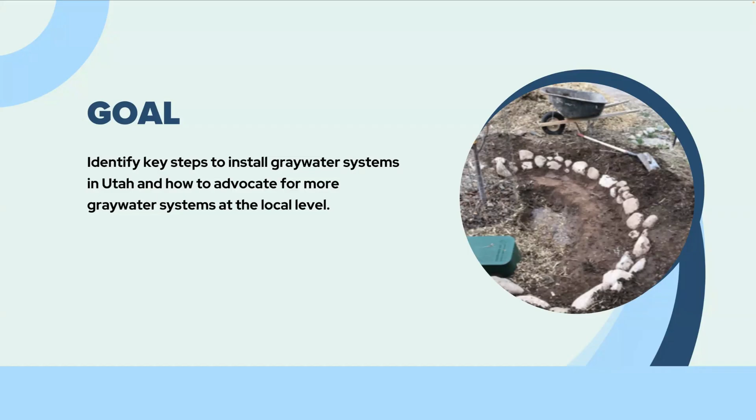Okay, so when you walk away from this talk, we're hoping that you'll be able to articulate what graywater is, and list major aspects of Utah's code. Of course, you won't memorize the code, but maybe some major parts that are important to know about our code in Utah, which was revised in 2020 and simplified, made much more accessible for people right in the peak of the pandemic. And for you to be able to describe benefits and drawbacks of graywater systems based on our experience, visualize a branch drain system, which is what my system is in my household, recall major best management practices, and be a local graywater leader. So with that, I'll pass it over to Orion here to talk some about the graywater code.

All right. So within the health department, we are charged with regulating on-site wastewater systems, and graywater systems fall into that regulation. So there's an R317-4, which is on-site wastewater systems. Most of you are going to know of them as being called septic systems, but graywater systems are quite a bit different from that. With the graywater system, and we'll talk about it more, what fixtures can go out there and whatnot, but graywater is a way to divert some of the water that would normally be going into the municipal sewer system. We can talk about septic systems later if we want to, but so that regulation falls into place.

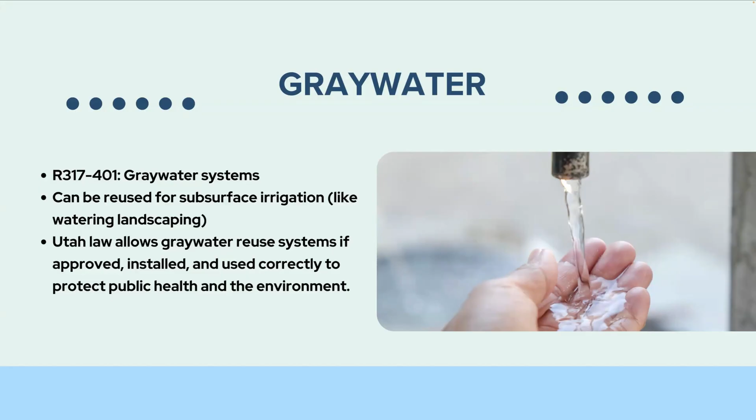And so after having chats with Roz and Jeff Adams, one of our other colleagues that we've worked on this with, I took it to the state to propose the idea of changing that rule, and then all of the other health departments, as well as mine, as well as the state DEQ, Division of Water Quality specifically, got together and rewrote the Graywater rule to make it more accessible and feasible for people to actually be able to do it. And so I think that's probably enough background on that for this slide. We'll go into more of it, I guess.

So Graywater specifically in Utah and many other places is just defined as water coming from the bathroom faucet, laundry facilities, showers, and bathtubs. And there's more slides that kind of talk about this, but you'll notice that the kitchen faucet is missing, and that's because of the higher expected bacterial loads that would be going through that from food wastes and other such things.

Go ahead, Roz. Oh yeah, sure. So I'll just, before I move into some term definitions, say that Orion did lead the charge, which was incredible, in helping to revise that state code. It was a many-year process. It was approved in 2020, I believe. And that allows for these gravity-fed systems as opposed to the more complicated systems in the previous code requiring tanks and pumps and engineered plans and other things. So we'll go more into that as we dive deeper into what these systems look like and how they work.

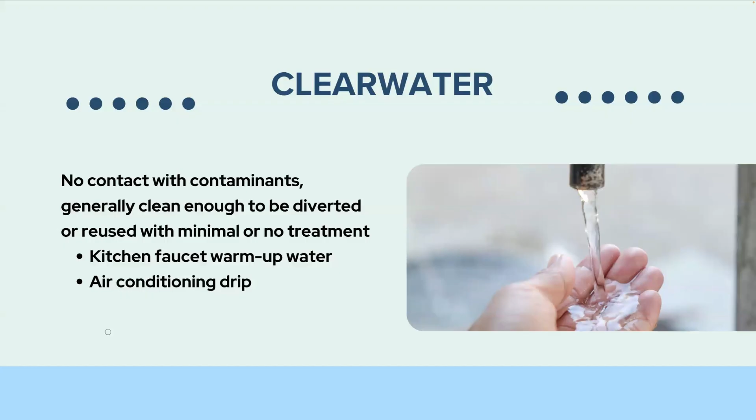So just to get our terms straight, let's differentiate Graywater from clear water. So clear water includes water sources like filling up or heating up your water to wash dishes in the kitchen sink. While you're waiting for that water to heat up, many people, including myself, will fill up a container to water plants with. And air conditioning drip also counts as clear water. This is water that has not come into contact with contaminants, and it's generally clean enough to be diverted or reused with minimal treatment.

Black water is not allowed in our Graywater systems, and that includes contaminants such as human waste or other high-strength organic contaminants, including high counts of E. coli. So that includes the toilet, kitchen sink, dishwasher discharge, soiled diaper laundry water. So your laundry could be used for Graywater, but it also depends on what you're washing and what chemicals you're using, whether it needs to go to your septic or sewer system. And photo lab sink water and water softener water are considered black water in the state of Utah.

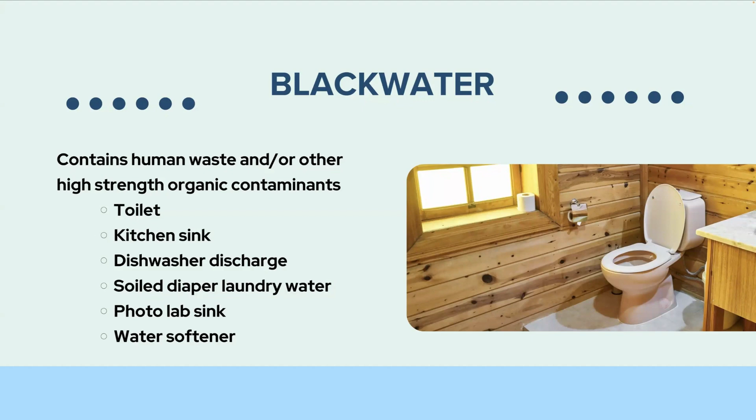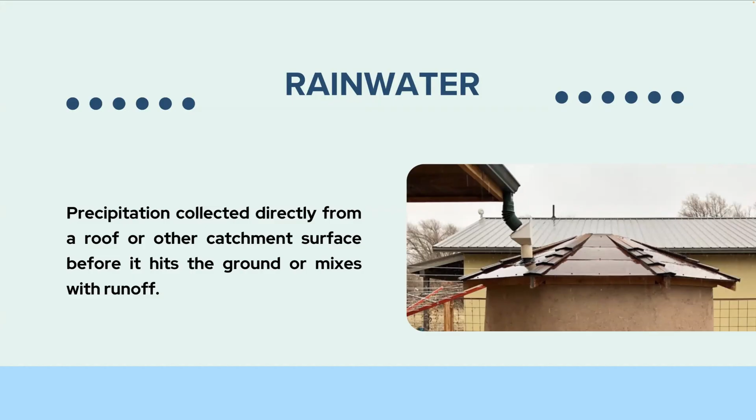Rainwater is precipitation collected directly from a roof or other catchment surface before it hits the ground or mixes with runoff. I harvest rainwater at my house. This is actually a picture of my tank. It's 750 gallons. You can legally harvest without a special permit in the state of Utah up to 2,500 gallons in above or below ground tanks at a time. So that doesn't mean per year. It means you could fill up 2,500 gallons, use it, and then refill it in the next rain event and use it again. So I love my rain tank. It's pretty full right now from the last couple of rains we've had in Moab, and I'll be using that to water various fruit trees and shade trees in my backyard.

So Utah Code 73-3-1.5, not that you need to remember that, but in case you want to look it up, covers rainwater collection rights and registration. And like I said, up to 2,500 gallons, and it is approved for outdoor irrigation and non-potable water uses in the state of Utah.

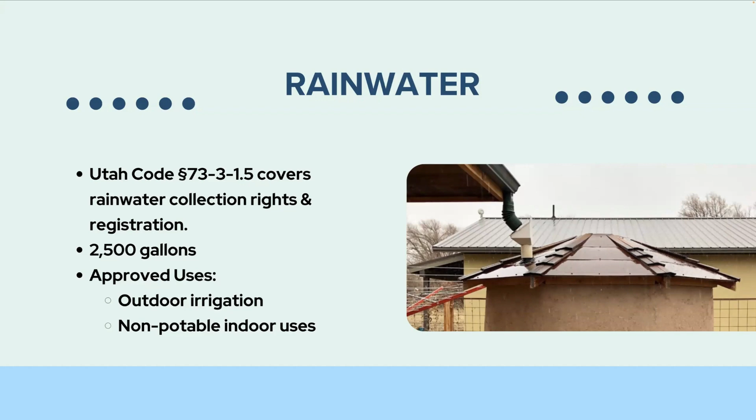Stormwater runoff is runoff that flows over land or impervious surfaces. We use stormwater runoff on the previous Moab campus, which is now the Free Health Clinic. We cut curbs and put in indented basins so that the parking lot runoff runs into them to grow shade trees for the parking lot. So this system is working in a more synchronous way than if we had a curb cutting off all that water flow and then needed to put in municipal water to supplementally water those trees. So we have shade trees growing in the parking lot that are on zero irrigation.

They just depend on parking lot runoff with curb cuts and indented basins. I'll add to that. We also installed a similar type system for the stormwater here at the health department in Moab, that also went through curb cuts into these basins. And we didn't have to water for like the last 3 years, but now we got a new road in front of the building and most of it got torn out.

So yes, that was unfortunate. I saw that. So we're gonna have to start over. But anyway, yeah, got the city on board. Yeah, we'll have to redesign that space at some point.

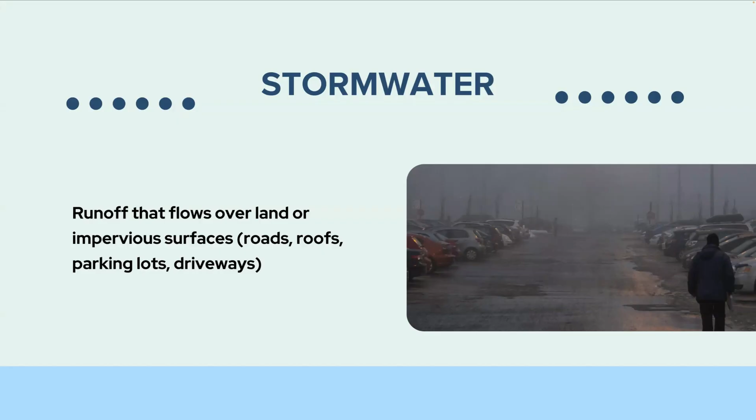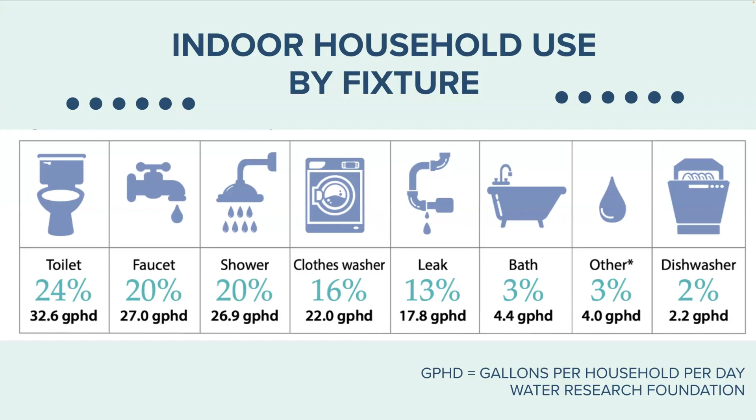If we just include the shower, clothes washer, and bath, you can see it's over 50 gallons per household per day. So this is a huge water harvesting potential into our landscapes if we had a greywater system installed. So just to show you some of the potential there. Just some more about the rule, and I'll pass it to Orion for this.

All right, so in the process of writing the rule, I essentially just wanted to write the rule specifically for gravity-fed greywater systems like Roz has, because it's a lot simpler. There's a lot less complicated things. So there was some hesitation amongst other regulators on only going that direction, as well as other uses. So we identified tier 1 versus tier 2. Tier 1 are those gravity systems. It's supposed to be super simple, super easy, and very little maintenance.

Whereas a tier 2 system could be used in a multifamily or commercial situation, or honestly on any residential home if you really wanted to. But I don't know why you'd want that extra complication. One of the biggest fights for tier 1 was that several of the other regulators were very insistent on having a tank before it went out to the landscape. Luckily, we were able to compromise with them and get this tier 1, tier 2.

So a tier 2 is going to have a surge tank. Think of it kind of like a mini septic tank. And then it's going to have some sort of treatment, drip irrigation. These can be kind of neat if you need to pressurize to get somewhere. But typically there's pumps and all this other stuff. Really the best application I would like to see a tier 2 go into would be like a hotel with lots of landscaping.

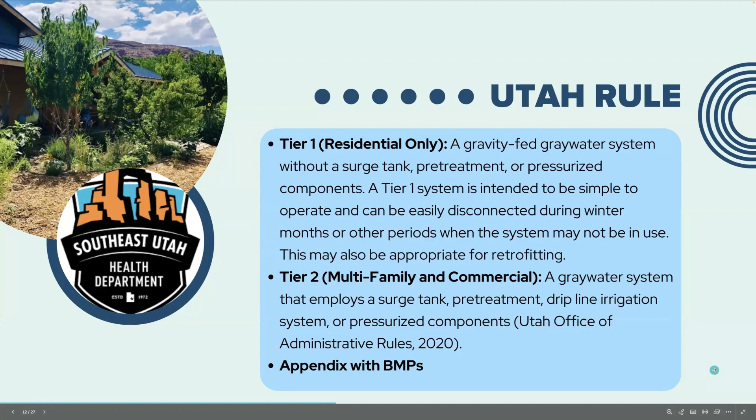Okay, so we're speaking specifically to the tier 1 type system that I mentioned before, which, if I remember right, is just these branch drain gravity systems that you're talking about. But in order to put them in, we need to determine what our soil types are, which is going to dictate the size of the basin necessary to hold the expected water to go out.

I mean, a clay is going to take the water on much slower than a sand, and really the sweet spots, if you have nice loamy sand or loamy soils, like Roz has here in this picture, that's kind of ideal. So anyway, the total square footage of the basin is determined by the amount of water being discharged, as well as the soil type, and that changes your size there, as well as many other aspects of the design.

One of the other parts that we have to do is there needs to be a way to divert to either your sewer system or your septic system, in the case that you're doing that load of non-disposable diapers, or you need to do a bleach load. I'm just speaking specifically to laundry right now, but if you're going to be putting something in the water that you don't want to go out to your landscape, there needs to be a way to go in between.

That can be accomplished in a number of ways. Roz has a 3-way diverter valve in hers. If I had one around here somewhere, I would have held it up, but I forgot. But another way to do it is behind your laundry machine, you can put a second standpipe and then just move that crook-necked hose that comes off the back of your washer from one pipe to the other, depending on where is appropriate for that laundry to drain to at that particular time.

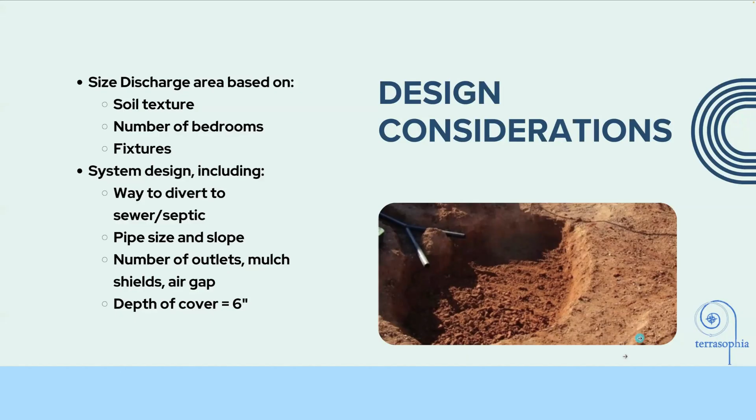You know the system, Orion. Yeah, I know that system, and little did she know she'd work for me someday in the future. Yeah, that's right. So yeah, go ahead.

Okay. So this is kind of more of a learning moment in a way. Well, these are design considerations. So lot size and home design are super important when you're thinking about doing greywater on a new build. We have a really amazing low income housing project in Moab called Arroyo Crossing, and I've learned a lot from that one because it's a combination of stuff from the Housing Authority of Utah as well as a local nonprofit called Community Rebuilds, and these homes are in a land trust.

We were really excited to put in like 300 greywater systems, and then it turns out that the lot sizes were too small to be able to fit them. So it's something that we figured out along the way, because that's where lot size and home design come in. Even with a relatively small home on a small lot, part of our regulations are that the water has to be discharged 5 feet from the foundation of the home for pretty obvious reasons. You don't want your home sinking, but also you're not allowed to impact your neighbor.

So the discharge is supposed to happen 5 feet from the neighboring property, and the area to put the basins in on some of these properties, there was only 10 feet to work with. So we had exactly 0 space to put one in. That was a little unfortunate, but something to be learned, and maybe changes to the rule can happen in the future to reduce those setback distances. But that was a really important lesson for lot size and home design being a major consideration when it comes to putting one of these in.

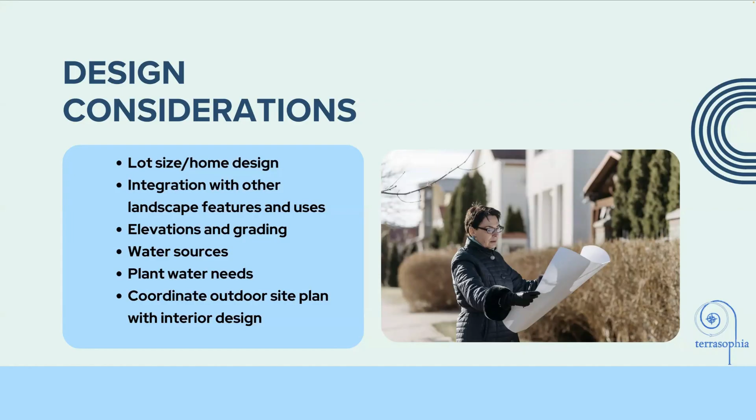So these Greywater systems produce dark, intensely rich soil matter, and it's so effective that it does break down my mulch every 2 to 3, sometimes 4 years. I've had the system, like I said, for 10 years, and it's every couple to 3 years on average that I have to clean out the system. And why I have to do that is because as the mulch starts to break down, it doesn't allow that water to travel as efficiently throughout the basin. And so I want that water to spread to more plants than just the cherry tree. That's obviously very happy on that outlet.

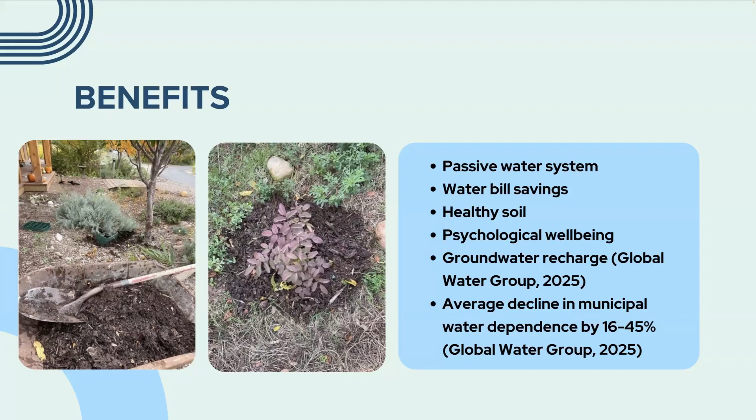Water bill savings, of course, water is pretty cheap in Utah. I don't know if that'll always be the case, so at least I like to know that there's a dual benefit, right? I don't feel as guilty having a normal length shower because it is watering the edibles of my front yard. And I mentioned the healthy soil already, and there's the psychological well-being as well. So you're feeling great about the fact that you're using that water for secondary sources. And there's evidence to show that these Greywater systems do help with groundwater recharge, according to the Global Water Group, and that we see an average decline in municipal water dependence by 16 to 45% for households with Greywater systems installed.

Some drawbacks include what Orion said about affordable housing, so the lot size problem. If you have an extremely small lot, then with the setbacks, you might not be able to put the system in at all.

And some other drawbacks, and Orion, feel free to plug in at any point here, but health department opt-in. We would hope the code, when it got put through, would be an opt-out where the health departments were automatically opted in and they had to opt out, but it was passed with an opt-in system, meaning that your local health department needs to opt in to approve Greywater systems. Do you want to say anything else about that part, Orion?

Yeah, so the health departments have to opt in to administer this rule. There's a few other rules out there like that. But the process is pretty simple. There's a section in the code that says that your health department can handle this additional workload and will administer the rule.

And so I was obviously the first to opt in. A few others have, and a couple others are talking about it. But there are some health departments that just aren't ready for it, I guess. So working directly with your local health department to opt into the system is a really important start to being able to do these systems throughout the state.

My understanding too, Orion, is that some of the health departments feel like there's not enough demand for it. So the more that they hear from people about wanting these systems, the more likely they will be to opt in to approve them. Yeah, and that's very true. It seems like there hasn't been enough education to builders and plumbers, and we'll talk about that more. But just getting some of those professionals that would be designing something like this to propose it to new owners or existing owners as an option as part of standard design can do a lot to promote these further throughout the state.

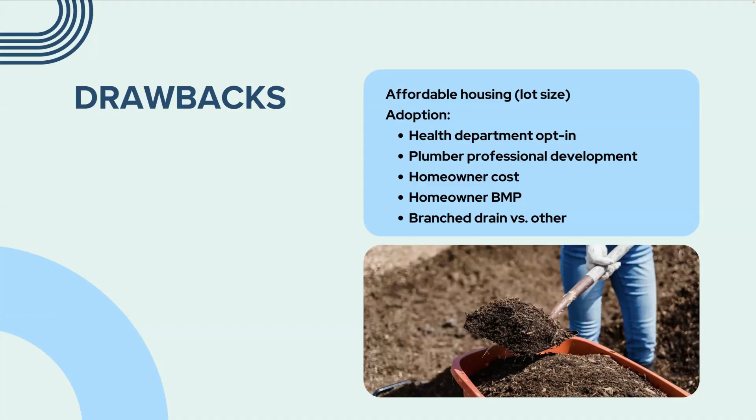Okay, so what's in a branch drain system? There's a couple main components for that. You have your source, which is of course the outlet.

So for my system, it's the washing machine and the bathtub and shower, which are the same thing. I didn't plumb my bathroom sink. If I could turn back the clock, I would. At the time, I wasn't sure I was going to have kids, and my husband and I are pretty water wise, and we thought it would be too high of a salt load just from brushing our teeth. But now we have children, and we would change that if we could.

So the 3-way valve is another component we've talked about a handful of times. I've got a picture somewhere in here. Pipes and fittings are needed. Flow splitters are needed. Your discharge area, so your basin, sized appropriately. The mulch shield. This picture of this greywater system, I'm not sure which system this is. It's just a picture that I had for a very long time.

These outlets are not sized large enough for Utah. So these are too small for an outlet. You want at least the 5-gallon bucket size, as Orion said, or larger, and having mulch over top, and then your vegetation planned appropriately.

And to clarify there a little bit, the reason that those are required to be 5 gallons now versus those ones that you can see there that are probably a gallon and a half is purely based on observations made at Roz's system. They weren't functioning quite right, but when she made changes to her system and added 5-gallon mulch shields, things started working better. So we actually had hands-on experience changing that state rule through personal observations.

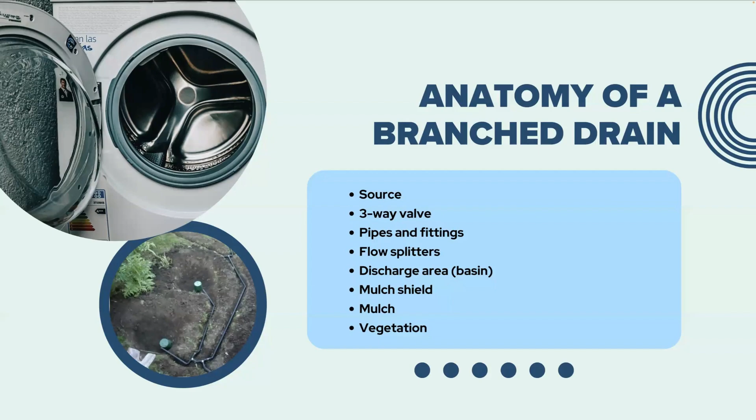And what the health department doesn't want is pooled gray water, because that's when you're breeding bacteria and it becomes a potential health concern. So you want that to be infiltrating into the soil as well and as quickly as possible. Did you want to talk about this image, Orion?

Yeah, I can talk about it, but I'll also add to that, aside from all the stuff I mentioned before about the pooled water and human interaction, one of the other worries is creating places for mosquitoes to breed and causing other vector issues. So also pooled water, cockroaches, all sorts of fun stuff that nobody wants around their house. Especially when we're building something that could be a pest harborage if the water wasn't taken care of properly.

Oh, actually, can't people see this mouse? So if you move it... Oh, cool, you can see it. Yeah.

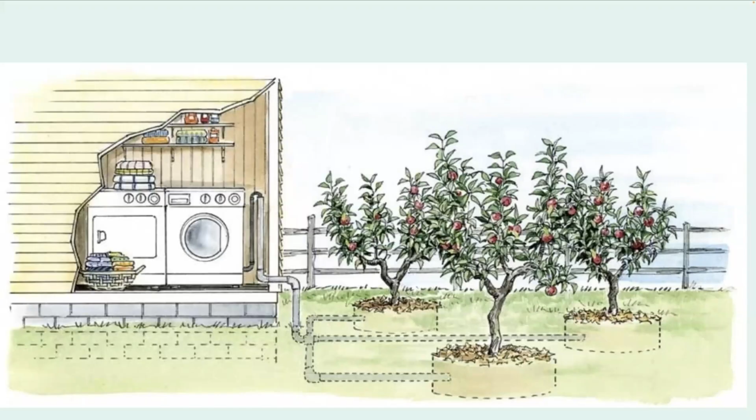That's why the air gap that we were mentioning earlier. Yeah, so we'll just spend a couple more minutes and mainly show some pictures. And I want to just talk first before that happens about the operations and maintenance of the systems. If you're putting this in and then you're using it, how do you maintain it over time? That's a picture I mentioned that was coming.

Orion already mentioned the pooling and runoff and why that was a problem. And you need to have a 3-way valve that you can turn to the sewer system, and maintaining that wood mulch, you want to check and see how compacted it's getting as that water is in your system and how much it's broken down. Because once it gets to a point where it's really compacted or broken down, then you'll want to use that as effective soil somewhere else, and then put some more fresh mulch in the system.

And yeah, making sure that you are taking care of your plants for their specific needs. So I tried to put the more water intensive plants closer to the outlets, and then more desert style plants further away. And you'll see that in a picture in a second. And then this last point, other information as deemed appropriate per system. Do you want to mention about that, Orion?

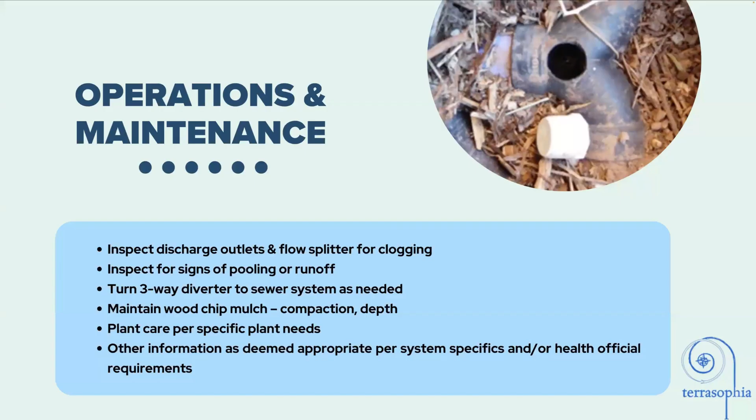Yeah, and just one clarification, Jandy is a brand. That's right. Technically, I think there's other ways to valve this, but we found that those are the most simple at this point. And you also notice, and it's kind of hard to tell, some of the purple that you see in these pipes is actually just the glue and whatnot, but these pipes are required to be painted purple to identify them as being non-potable. Yeah.

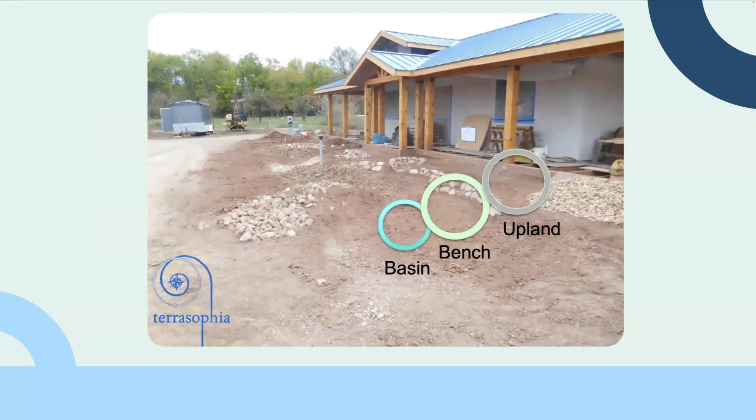This is my system going in at my house. And so looking at the different plant needs, thinking about this is like the basin, you have the middle of that indented area, the bench in between, and the upland where you'd plant less water dependent plants. And so thinking about my plant scheme that way as the landscaping went in. Here you can see that purple pipe that Orion was talking about. My 1 gallon outlet, which we discovered over time was too small, in that west basin, which is beside the peach tree at the time. This is a picture I just took when Orion was at my house the other day of that same peach tree.

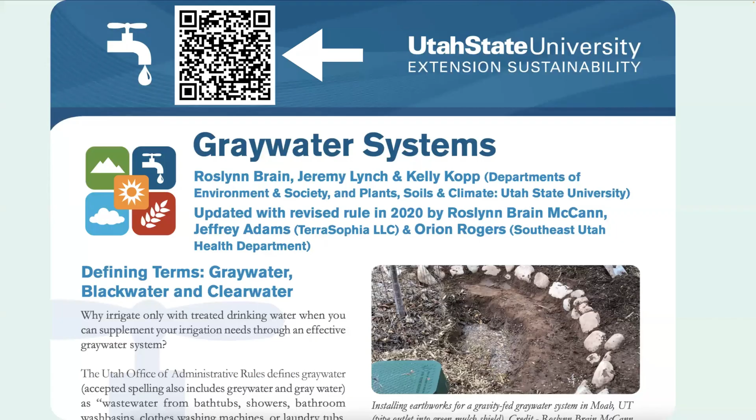And then to wrap everything up, if you want to get out your device and take a picture or scan, shows you how often I use QR codes myself, but if you want to capture that QR code and access our fact sheet on Greywater systems, Orion was a co-author on the original main writing of this, and then we did a couple updates as well. And so you can see them there in the co-author list. And that goes through a lot of what we talked about in today's presentation. And I'll show you that online here just to show you what that looks like.